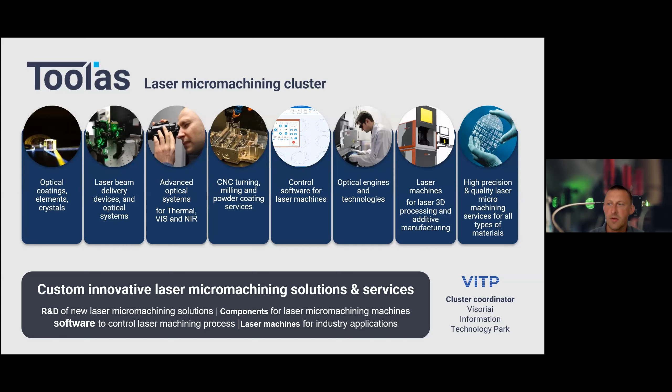So if you have some issues that laser micromachining could solve, you can contact Maria directly. He will put you in contact with the right person, and we will try to serve you with our competences and expertise, and we would be glad to help solve your current issues. Thank you very much for your attention, and have a good discussion today.

Maybe you have some questions? Please ask. I see Chris is clapping - it's not a question, yes? Okay, so thank you, Tadas, very much for this nice intro of our cluster.

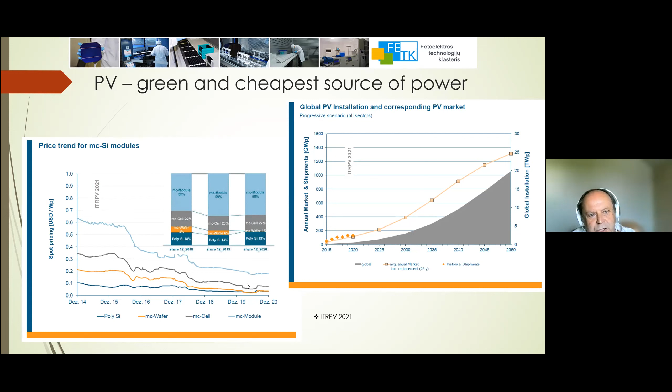What we are doing in Lithuania with PV. Actually, we established the cluster somewhere in 2008 by initiative of researchers and industry. Okay, at this time it was not industry but investors going into PV business. And through these years, we have seen significant, let's say, transformation in strategy of the cluster and cluster industries.

Actually, when we started, the PV market was really growing fast, about 30% a year, and it was highly profitable. And the cluster strategy was to start this sector in Lithuania through new manufacturing facilities, both in solar cells and modules. In parallel, it was clear to everyone that we also need R&D infrastructure, which will support our industry with innovation flow from the R&D environment.

Today, in recent years, we are also facing the same growth of the PV sector in the world, but it's really changed significantly. Today, it is very low profit and is dominated by Chinese producers, leaving something like less than 1% of production in Europe in general. Therefore, I would say proudly that we not only survived during this shift, but we are also growing. We are opening new companies and new facilities for production.

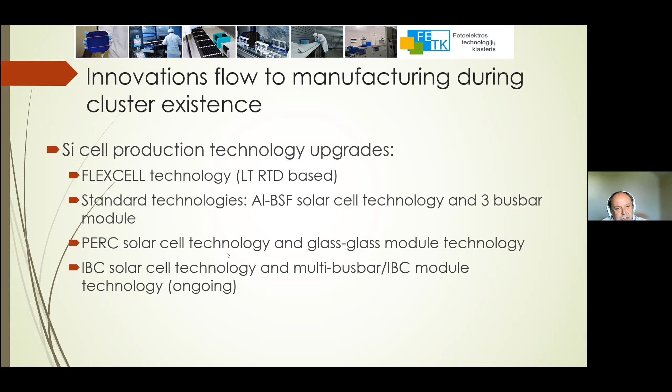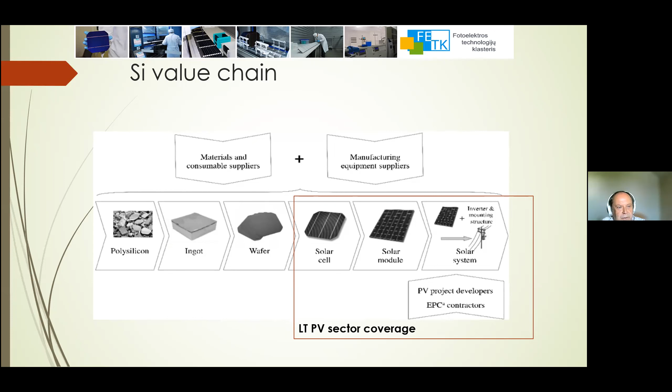Back to basics on silicon technology. I'm not touching thin film; I noted that in the other presentations it will be covered. Therefore, I am just trying to focus on technology which is available in Lithuania. Talking about the solar cell, it's quite an easy device. It's the largest diode in production in the world.

It means when you have a wafer of silicon in the semiconductors business, you are producing an enormous number of microchips from one wafer. Here, you are producing a single diode on the whole wafer. And it is just a few technological steps to produce such a device.

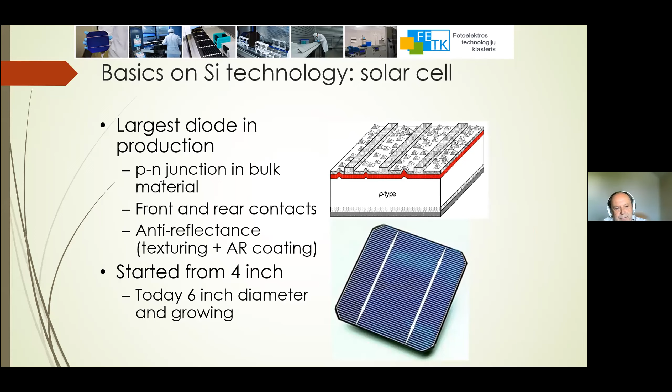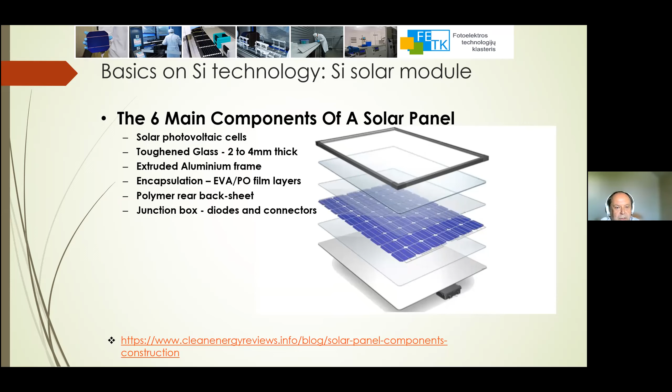When we are shifting to the silicon solar module, it is, let's say, a sandwich of several simple materials with connected solar cells in between. I'm just showing what it means, but I don't think it needs to be explained. It's quite simple. As you see, solar technology in general is very simple technology, and still there is enormous potential for innovations to improve quality and performance of these devices.

As we are talking about lasers, I want to show you an example of how lasers can be used in silicon technology. I was mentioning this technology in the earlier slides, and it was an investment of our industry to build a factory based on completely novel technology, two novel technologies as it appeared in the later stages. We started from self-aligning copper contacts, built equipment for copper contact deposition, and we were supposed to move to large-scale silicon solar cell production.

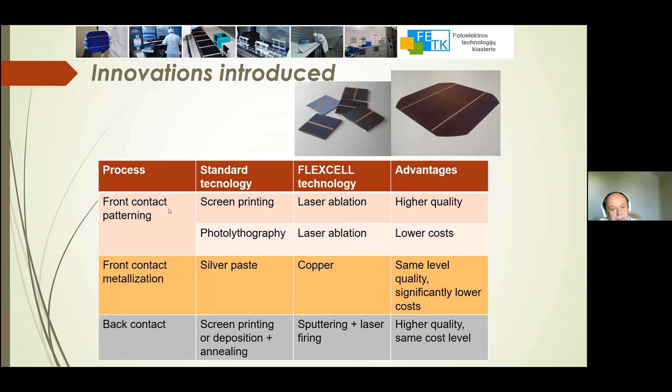What is the difference with standard technology? As you see, we were able to demonstrate higher quality, lower costs, and possibilities to produce with less use of argentum, that is, silver, and have quite high quality devices.

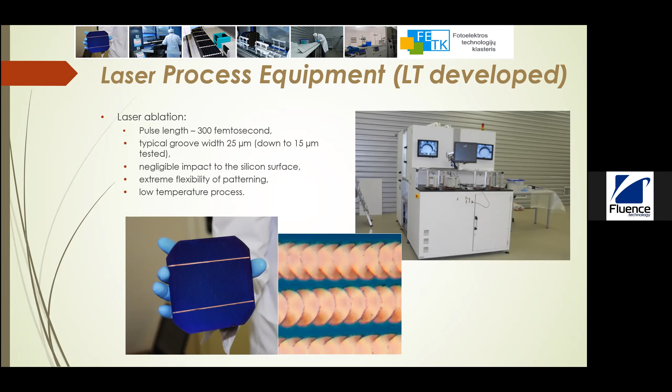We stopped with this technology. Here you see laser process equipment, which was developed by a Lithuanian company. It was using a femtosecond laser, quite an innovative approach. And in these grooves, it was possible to grow extremely narrow contacts for those times, down to 15 microns, which were helping to get higher quality solar cells.

It was supposed to replace some parts of the standard production line, where all contact-related process steps were replaced by laser processing and nickel copper electroless plating deposition.

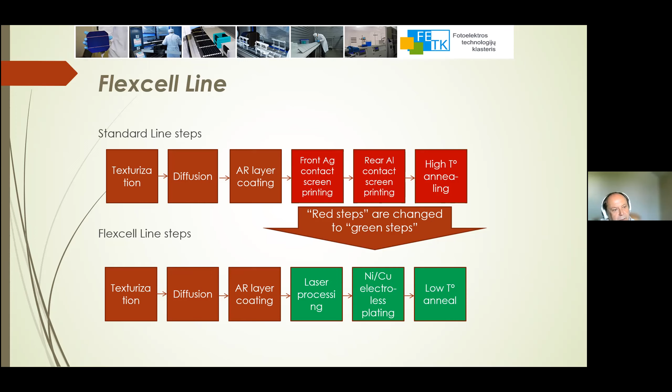But actually, we were able to demonstrate efficiency, repeatability, homogeneity, good capex and opex, but we failed with scalability and throughput to go into higher numbers of cells per hour. It means we stopped at TRL 7 level, and this technology failed to come into the market.

This is why I was talking about this example. I would say that we need to be very careful with the innovations we're choosing. We need to analyze the innovation's capability to meet all these commercially important segments and points, and only this way you can attract really high investment from investors into your technology if you are putting on the table any kind of innovation solution.

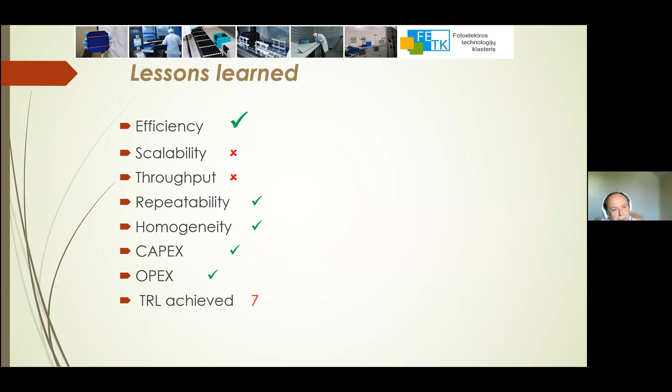Okay, and this is all I would like to go through, and I would like to finish with one simple sentence. Solar technology needs innovation. It's, to my understanding, in the very early stage of what needs to be done. And as an example, I would like to point your attention to a book written long ago by Arthur Clarke. I hope you know this science fiction author. And in his famous 2001: A Space Odyssey, you can find, let's say, a device which is our future.

It means a 100% efficient solar energy converter, which is able to convert on all wavelengths all energy into useful energy for you. Today, we are at the level of, let's say, something like 25% efficiency. So it is only a quarter of the capabilities we need to have for converters. Okay, this is all I want to say, and thank you for your attention.

Questions, please. Thank you very much for the interesting presentation. Now I'm really engaged to read the book. I saw the movie, I love it, Space Odyssey. And now I see Egidijus has a question.

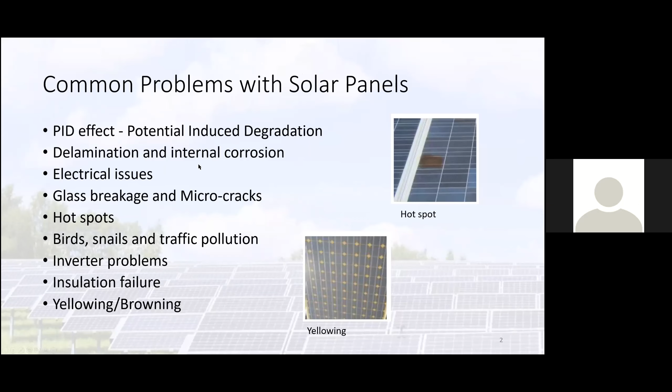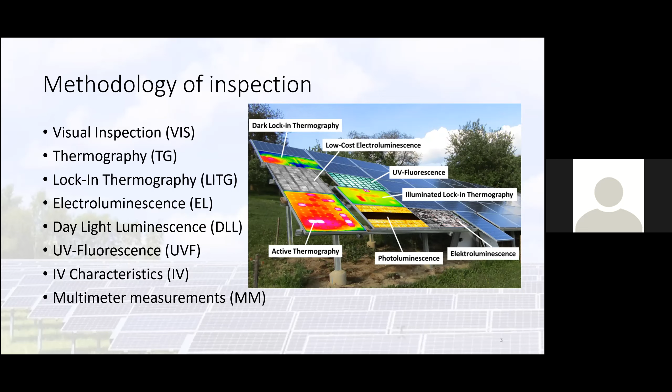Okay, so visual inspection. This is the most trivial and still most effective method, especially with people who are trained and able to detect module failures by simply looking at them. If you have an experienced eye and know common problems, it's much easier. This can be done right away when you get the panels before installation, and usually it's already done in the factory.

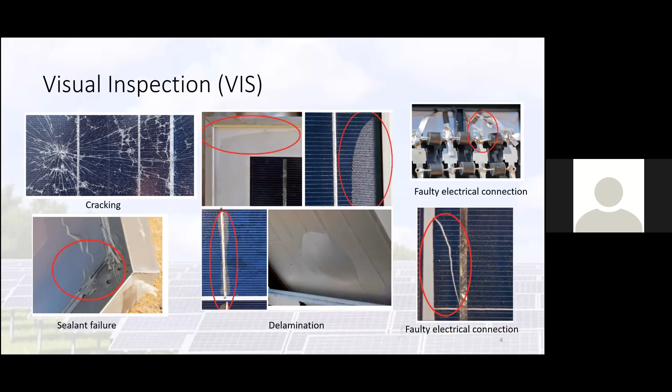Thermography. This is a common method, and we as a company are more used to it because we produce thermal devices, and from time to time we had a chance to help determine the problem for some of our customers or friends who like to check if everything works properly, even during the acquisition of a parcel with solar panels. This method works with direct and indirect heat, where the photovoltaic module is turned on, and it's very fast and contactless.

You can perform it during normal operation in good or bad weather conditions, but usually it requires about 600 watts per square meter of sun irradiation so you can distinguish the temperature differences. Temperatures of single cells which are working properly and intact may vary by a few degrees Celsius. If for any reason the electrical resistance increases, you can see a significant rise of temperature, which allows you to see where the possible defects are coming from.

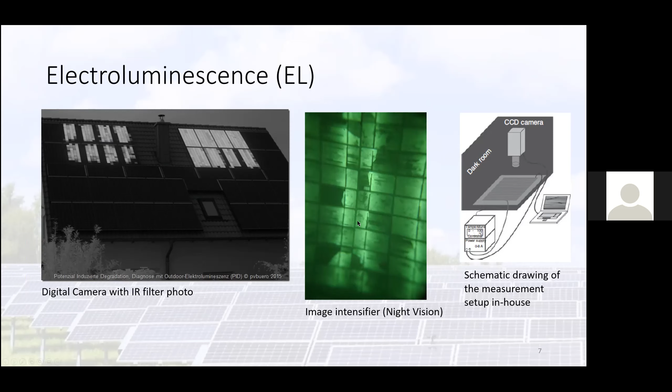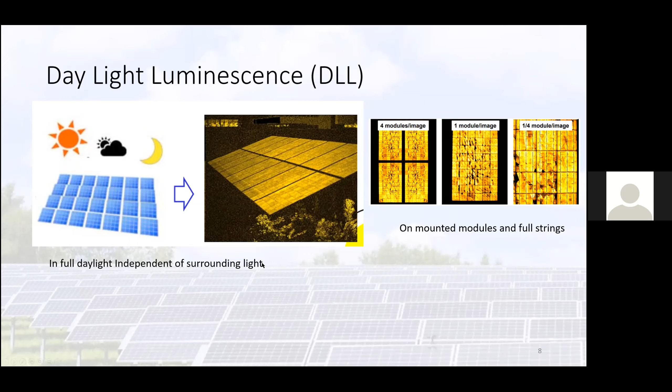Electroluminescence is, as I mentioned, the most common as well for indoor use, because you reverse the bias of the photovoltaic panel, and it works as an LED, and then you can see the emitted infrared light. And using a digital camera with an IR filter or image intensifier, you can detect that illumination. Daylight luminescence is the same method, just using indium gallium arsenide cameras, which are more sensitive than silicon cameras, so you can watch the same effect in daytime.

UV fluorescence is a method which uses UV cameras, and you can see the defects which happen because of long-term exposure of solar panels to sunlight. So by illuminating the elements with a UV source, or using a UV camera with a filter, you can see how these elements look under UV light, and you can see the defects which accumulate during the use of the elements.

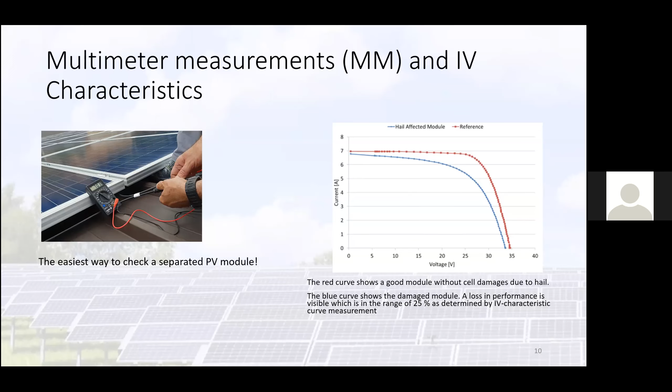And the last one is multimeter measurement and IV characteristics. IV relates to current and voltage, where you can do direct measurement with a multimeter, seeing the power produced by solar panels. And with IV characteristics, you can measure the starting parameters of your solar cells, and then monitor how it acts later on. So that's it.

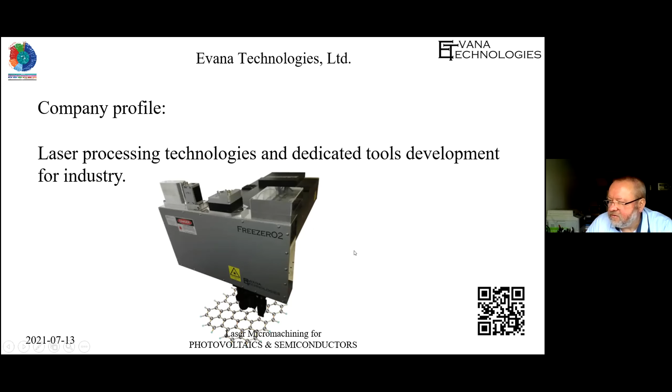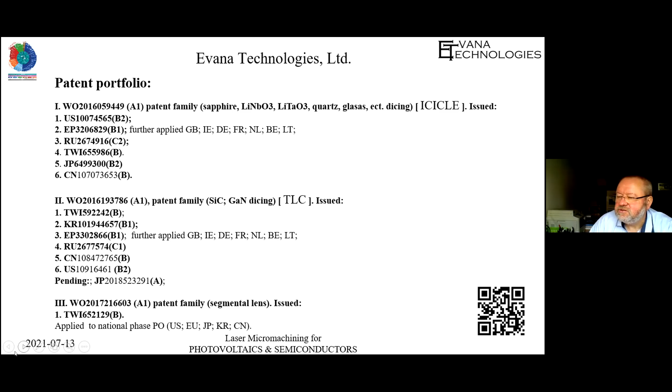Both technologies are protected by a patent portfolio. For ICICLE we have issued patents in 6 countries, and for thermal laser cleaving we also have this patent issued in 6 countries.

We start from silicon carbide, because it is the only material for this technology for the moment. Silicon carbide, as you know, is quite a promising material for high power and high frequency, radio frequency microelectronics, and really for future green technologies for electric vehicles, renewable energy, and so on. The next field is radio frequency devices, meaning mobile communication.

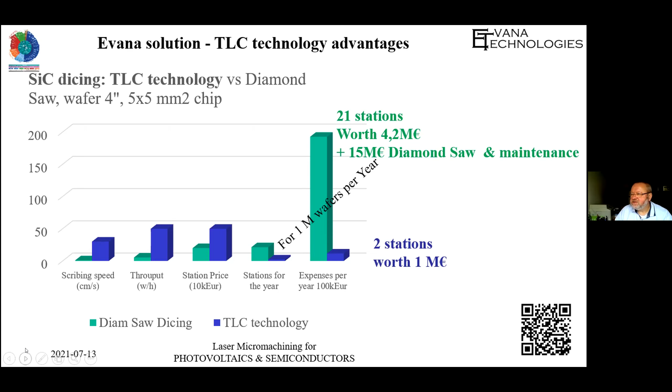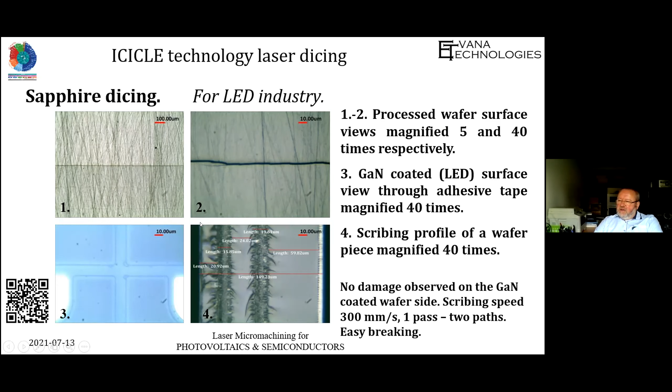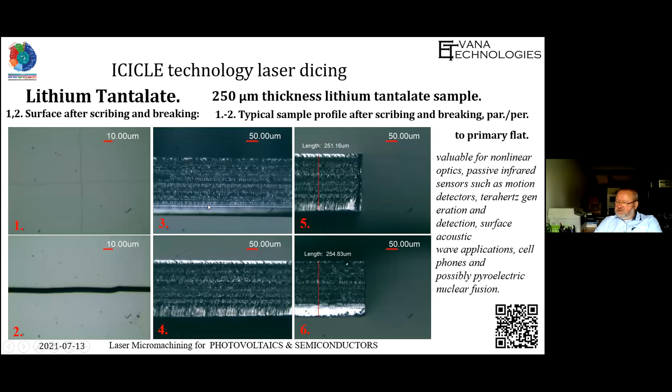So that is it, and really we are open for collaboration and for some integrators in these applications for these materials.

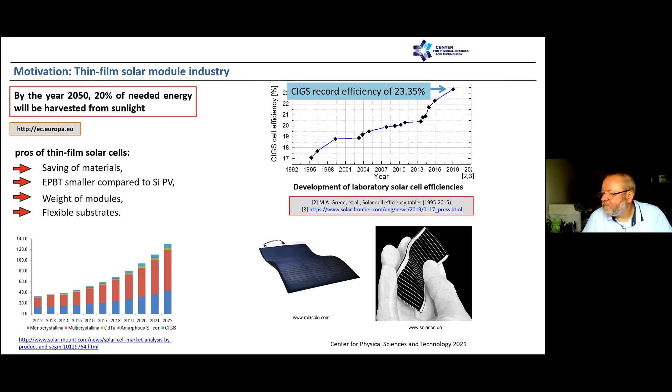Now I'll move to thin film processing of CIGS panels. Why do we need to go to PV? This was already discussed. The main type of cells are dominated by silicon PV, and most installations are on silicon-based solar cells because they are quite cheap and efficiency is quite high. When we started in 2009, CIGS thin film technology was very promising. It's a thin film technology, so you save materials, and energy payback time is better than for silicon. The modules are very light and can be made very flexible, and efficiencies are quite similar to silicon-based PV. Now I think the record efficiency is about 23.35%.

But as years passed, all the companies we collaborated with, which had some projects, were either bought by Chinese companies or went bankrupt. Now all CIGS manufacturing is only in China, and they are further developing some new module productions.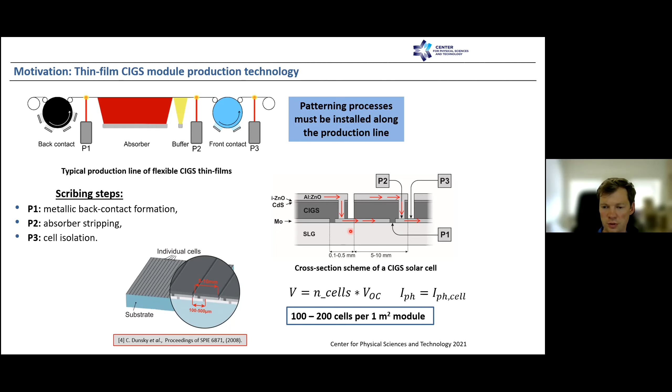What we get is cells interconnected in series, with the red arrows representing current flow in the module. Instead of one cell, we have from 100 to 200 cells in one module. This interconnection and scribing is done mainly by laser technology, and our research was mainly concentrated on the P3 process.

So, cell separation or isolation is the most challenging process, because during laser processing you induce some heat effects, and this can lead to CIGS material degradation. That means you can have changes in the cell's electrical behavior or additional parallel resistances due to material degradation, which affects device efficiency.

Our primary thought was that we need to use ultra-short lasers to reduce the heat affected zones and heat effects to the minimum.

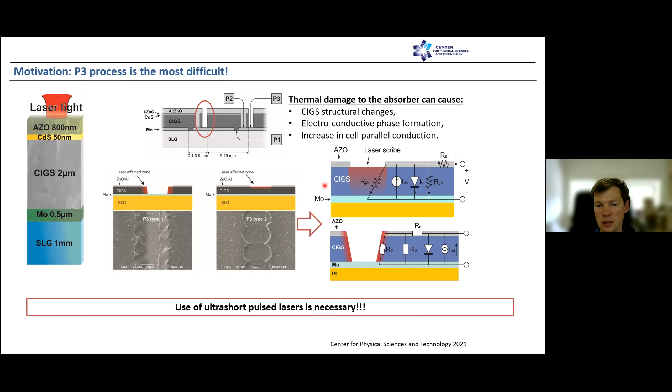We also developed a technique where we can optimize our laser processes. We call this the linear laser scribing technique. Basically, what we do is measure this additional parallel resistance of a laser scribe caused by material degradation due to exposure to the laser.

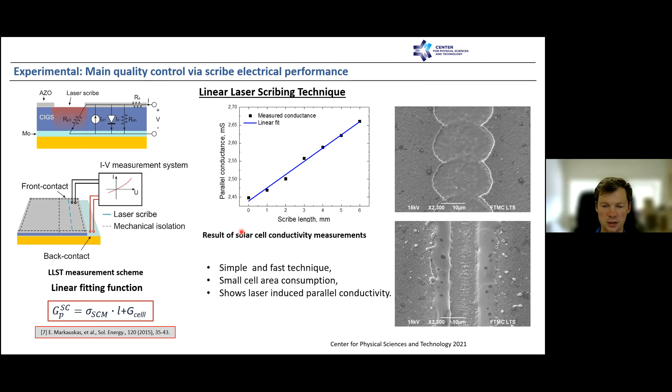What we do is scribe a predetermined scribe length, then measure the IV of the groove. From this scribe-and-measure procedure, we can extract specific parallel resistance values of a laser scribe in Siemens per meter units. This is a really good way to characterize our laser process, and we have to keep these parallel resistances as minimum as possible.

We used several types of lasers: a picosecond laser operating at fundamental, second, and third harmonics; a special laser operating at 1342 nanometer wavelength; and a nanosecond laser operating at far infrared, 2500 nanometers.

Depending on the system, we used Galvo scanners or XY stages for the P3 process. We investigated two types of P3 processes: one to remove the full layer stack to expose the molybdenum back contact, and one to remove only the front contact. We used fully operational single cells from one company, scribing between the contact grid, and measured the additional parallel resistances caused by the laser processes.

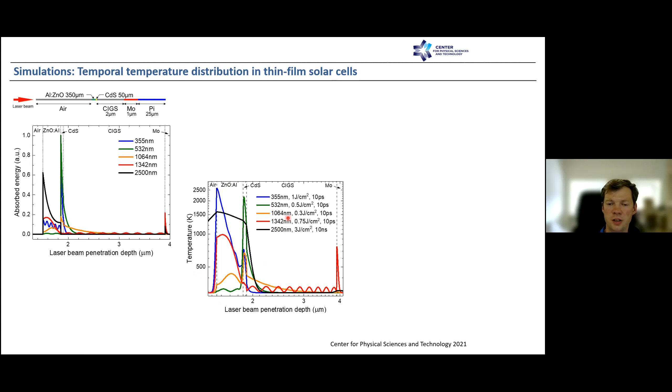We also did simulations of how these different wavelengths interact with the multi-layer structure, including laser absorption and recalculated temperature distribution inside the thin film structure. Most of the temperature and absorption occurs at the top contact layers, but we see some diffusion of heat into the CIGS as well, for example with infrared wavelengths like 1064 and 1342 nanometers. You even get a temperature spike at the interface between molybdenum and CIGS for the 1342 nanometer wavelength. So some wavelengths might affect the CIGS layer more than others.

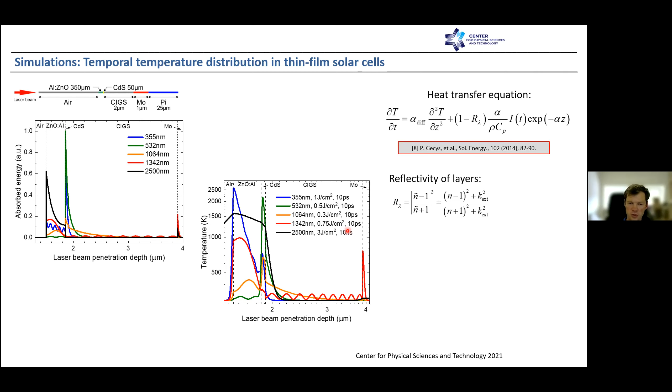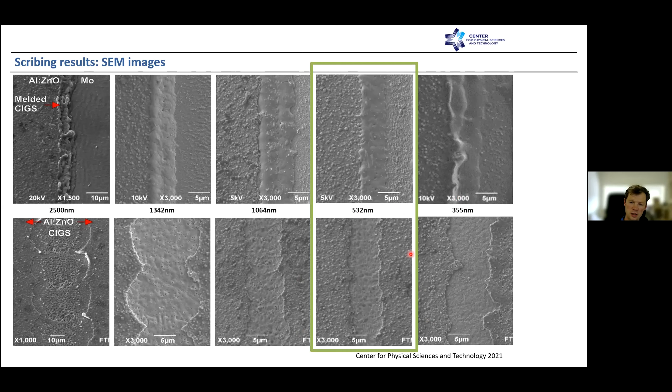Again for P3 type 2, we see ablation only of the top contact with some modified CIGS layer. From visual inspection, the picosecond laser green irradiation looks pretty nice, with good results for both P3 type 1 and P3 type 2 processes. Now let's see how the electrical measurements look for these wavelengths.

That means we remelted the CIGS and we induced some structural changes, and we have really induced parallel resistances, and this is really bad for the cell operation.

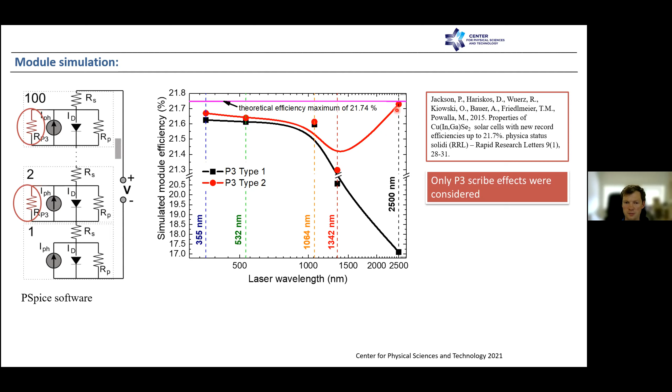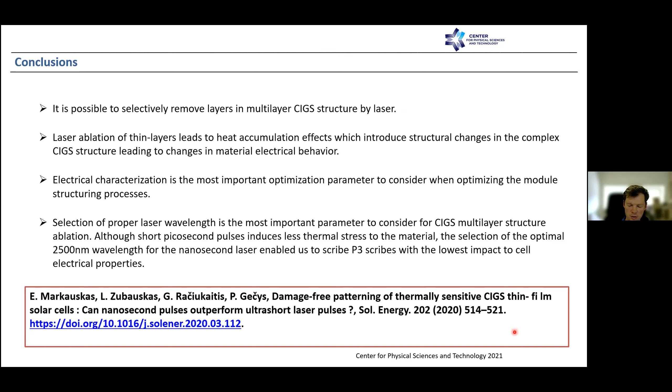So, conclusions: it's possible to laser structure, or selectively remove layers with a laser. From our research, we see that it's really important to properly select the wavelength, and it's even more important than selecting pulse duration. These results you can find in our latest paper. Thank you for your attention.

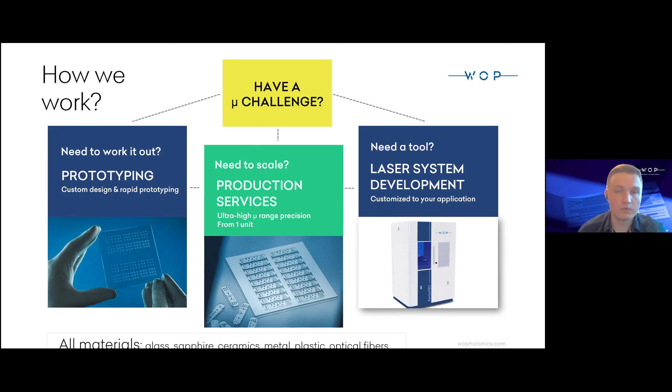As a company, we develop solutions not focusing on specific materials. Later we are going to focus on silicon, which is the key material in semiconductors, but WOP also works extensively with other materials used in this segment, such as glass and sapphire. We have glass and sapphire cutting technology for zero kerf cutting to dies, for example wafer level package electronics, later bringing those electronics into the packaging steps and eventually to consumers.

Another process we see as necessary for the semiconductor market is drilling. Although here we mention glass and sapphire, it's also applicable to silicon. Even big players have demands for specific silicon, glass and sapphire wafer machining to add vias, blind vias, trenches and so on in the wafers for their process development and production.

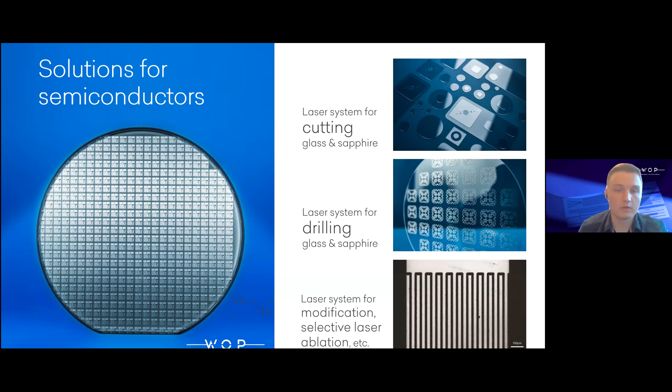And of course, recently discussed benefits from ultra-short pulse lasers. We do selective modification, selective layers removal for also various wafer level packaging applications where this process is a must-have step after extensive coating and wafer preparation steps.

So going into details for glass and sapphire cutting, the technology that we have, and I already mentioned, it's zero kerf cutting technology that allows maximizing the material use, so you don't waste the material and you don't have debris on your wafers after the cutting. It's well considered as a preferred solution, so to say, by the users, because you protect your own production.

You don't have to add additional washing steps, and of course you have maximum efficiency and maximum speed, so that directly concludes to the best price ratio that you can use and offer to your customers too. In the screen you see sapphire and also glass cutting examples. Specifically, glass can also be tempered.

This is not the limit for our technology. It can be of course tested case by case, but all sorts of shapes can be cut out from the wafers, sapphire wafers, glass wafers. Just want to emphasize this. We don't have limitation to use only square or rectangular shapes. It can be also circular, elliptical, and so on and so forth.

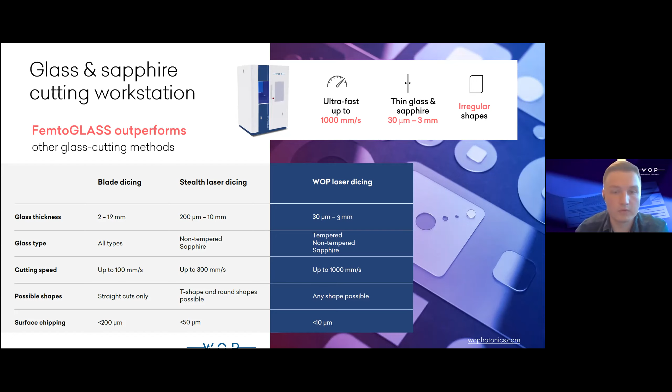Other methods and other processes that we offer are based on glass drilling. For example, we develop our own products, specifically glass carrier wafers that are used for temporary bonding and transferring the wafers in the production lines in the semicon industry. We have unique technology to create millions of holes per single wafer at very low cost basis that are crucial to be competitive and accepted in the semiconductors market.

We also produce guide plates for the probe cards. This sector is specifically focusing on ceramics, which is a sort of conventional solution that was accepted over the years. And the single challenge they have is how to decrease the dimensional sizes in the holes. So you always want to have denser contacts, so you go for the thinner probes, and of course then you have to go down to smaller holes, and more holes in single guide plates.

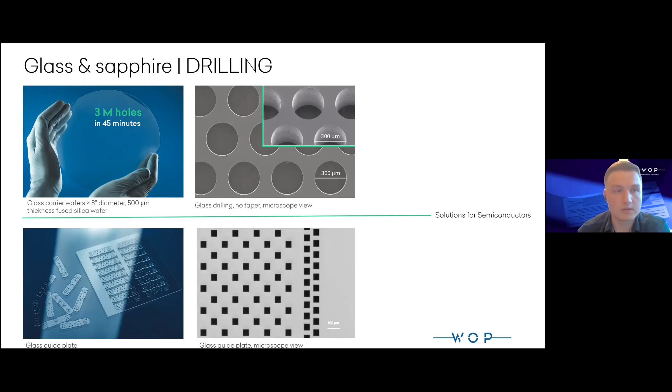And other limitations that we have, well, they're not really crucial, so to say, since the aspect ratio limitation in glass is 1 to 100, which is normally more than necessary. So we're really looking forward to testing the limits and seeing what works best and how. Typical hole diameters are down to 20 micrometers. Working on case-by-case examples, these can be even lower.

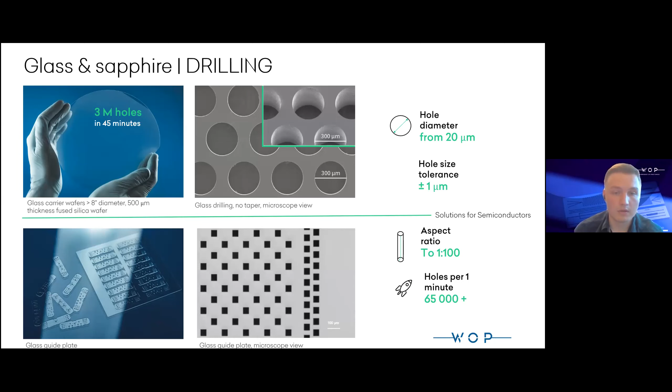Typical size tolerance for holes in sapphire, silicon and glass too is roughly around a micron. Also, depending on the case, these can be even higher tolerances. So really the technology brings you to the edge of what's possible to be done, at least these days.

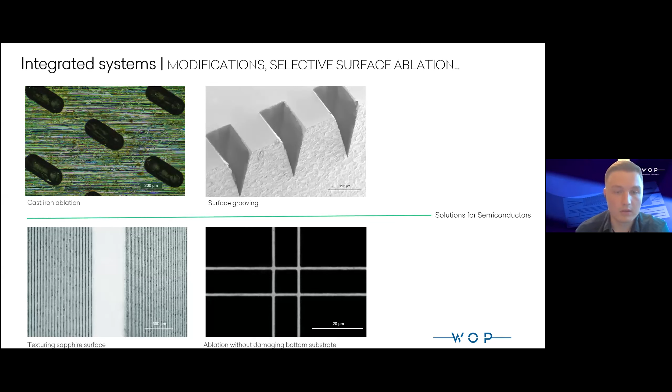Alternative processes that we find to be requested by our customers in semiconductors, so selective layer removal, grooving, blind holes, are maybe not requested on a production basis, but at least are discussed and looked for as development processes. So it would be really interesting to learn more and find out where and how they're planned to be developed into production processes in the future. So this is one of the things that we are working on now, to find out the key benefits and challenges that these companies have today.

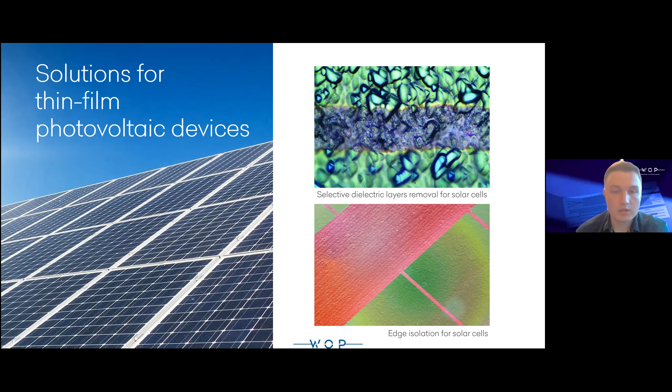And what other presenters have already covered is photovoltaic devices, one of the sectors of the semiconductor market our company works in. Over the years we have had a few successful cases working with conventional photovoltaic devices, specifically focusing on opening the contacts in solar panels and working on efficiency improvement. That was the key challenge for our customers, but since these elements were developed further,

the main focus for our company so far is thin film based photovoltaic devices, and we are developing a process for scribing these panels, so to say, something really similar to the solutions and challenges that the last presenter had. Differently, we focus on machine building rather than process development at this moment, since the key challenges are clear and our customers are looking for an implemented solution that's already broadly discussed in scientific publications. So our company is offering a laser scribing workstation to do this scribing process.

Mostly we are offering UV lasers, so 355 nanometers wavelength or 343, depending on which specific laser model is chosen by our customers. The limit in positioning size so far is 300 by 300 millimeters, based on the processing size that our customers have, but that can of course be larger if the devices are planned to be used in larger dimensions.

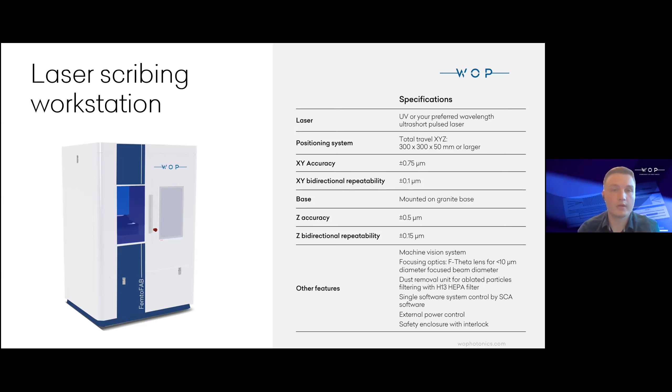Uniquely, we have the capability to adjust the focusing not only manually, but we can have an autofocus solution added to the system. Also, we have a machine vision system integrated in the platform, so we can have visual recognition of the alignment marks, which simplifies finding and working with these elements during the scribing process. The system is fully integrated by us, so we are also offering our own developed software for full system control. The same applies to single company support in the after-sales procedure.